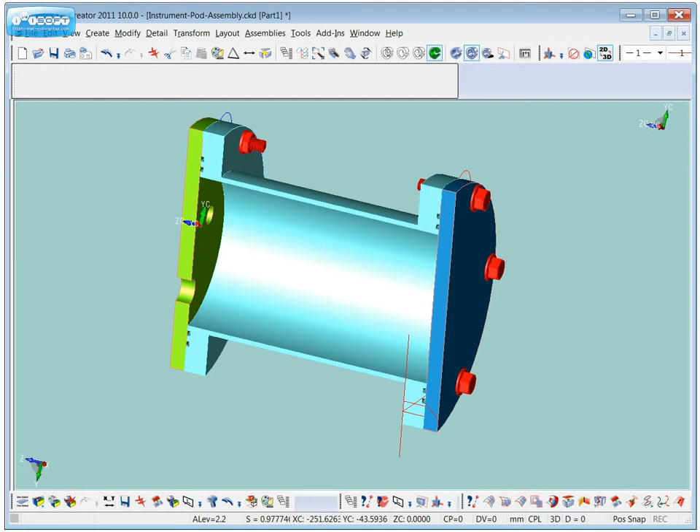From previous work, we're just going to look at this assembly, colour it in a similar way and take it into Femap, where we can apply our glue between the different meshes.

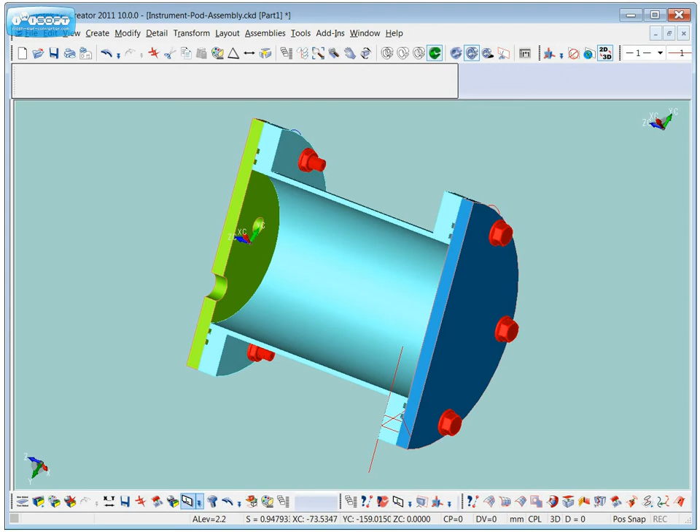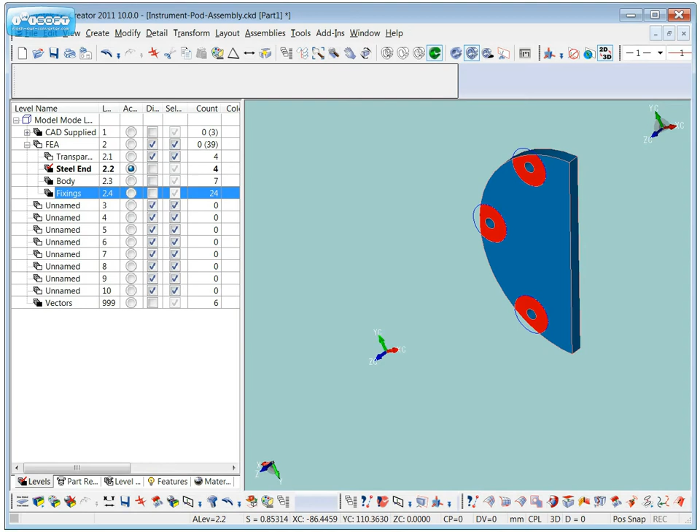So we've worked out the effective clamping zone that we're going to apply, and that's the red circles there basically. So we've seen how to do this before, but the red circles are simulating the effective clamping area of the fixings. We're not going to model the fixings or the shank and so on. It's a fairly simple quick look-see analysis.

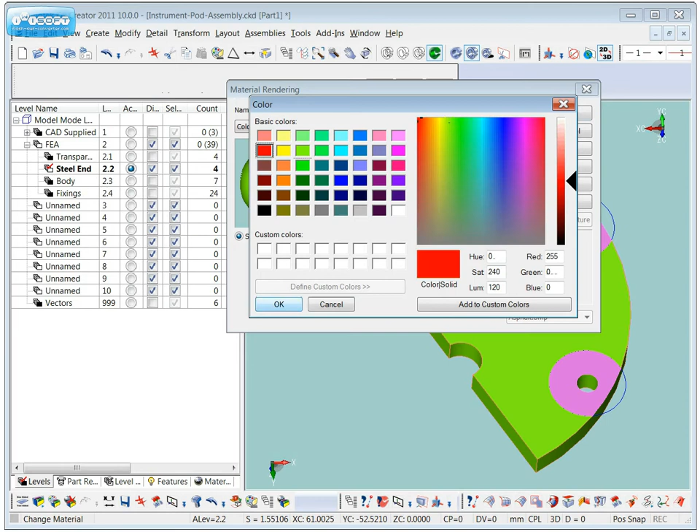So taking one of the bits, I've already split the surfaces as we did before, so I'm just going to change the colours just to make things a bit easier when I go into Femap really. So we'll make them red again. I tend to make them all the same colour. You can then pick the colours by surface in Femap if that's what you want to do. There's lots of ways of doing it.

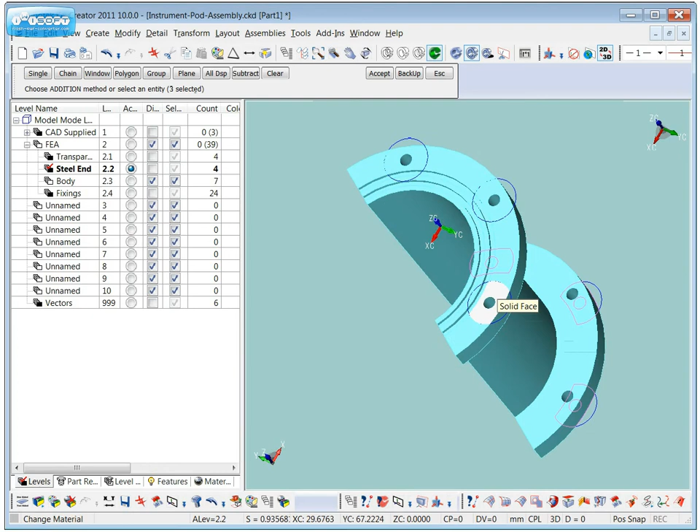And the same with that body. We'll just get rid of that end. Just look at the body, and again we've already split the surfaces, so we'll just do the same again. Pick all of them in one go, spin the model round, and make them red. Remembers all the colours, and that's it. So we've got 3 parts of the assembly now, all modelled.

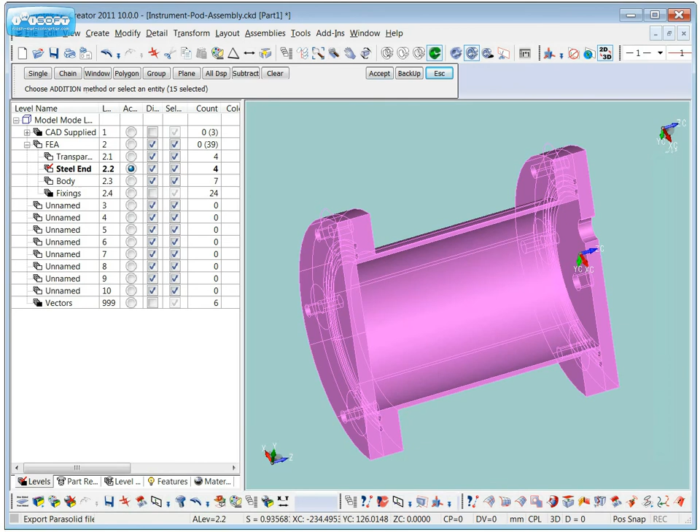Got the colours, various clamping faces. We're going to use the glue command inside Femap and Nastran. So we'll just export this as a parasolid, and as I said in the previous video, Femap's a parasolid modeler. So pick all the parts. This is 3 separate solids, give it a name, call it assembly or whatever, and then export that file. There's nothing else really to do.

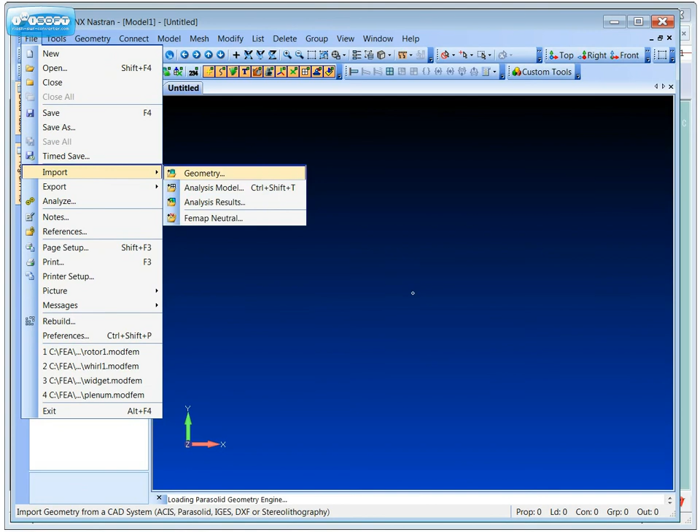That's it, done. We'll go into Femap now, and we'll just import that file, and then Femap will import it as separate parts, so it is an assembly. Change the scaling factor, because I'm using metric, increment that colour thing or turn it off like I did before, and then that's it. Read it in. Now we'll have a quick look round in Femap, and it looks pretty similar.

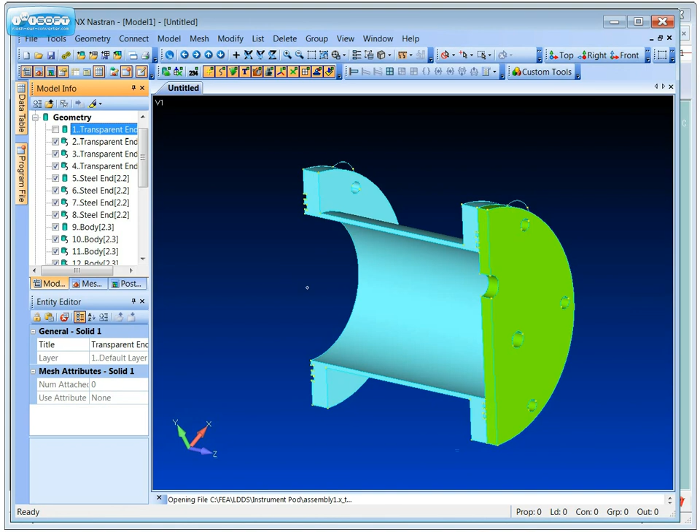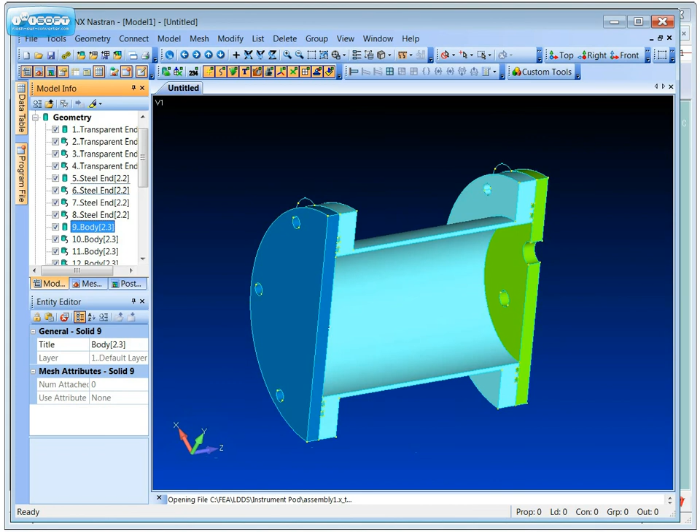Now in Femap we can turn the parts off, so we'll just turn a couple of parts off and just have a look, make sure we've got our red areas. There we go, look. Spin that round and have a look at the other parts. There you go. And then what basically we're going to do is use those red areas to glue the models together only at those points to simulate the clamping of the bolts.